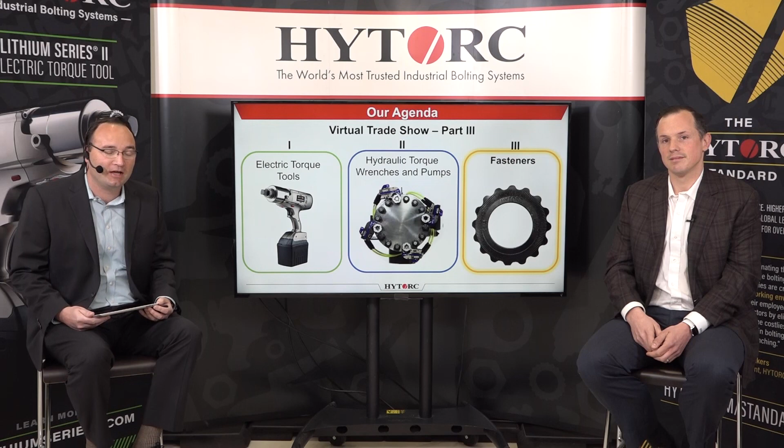So let's set the agenda. Of course, on day one, we started with the electric torque tools, and the Lithium Series 2 tool, certainly the star of the show. We also talked about the Lion Gun there. Yesterday, an impressive lineup of wrenches that we went through. Pumps as well, we talked about the Vector Pump, the Vector Mini. Plenty to talk about yesterday. And then today, we're going to talk about fasteners.

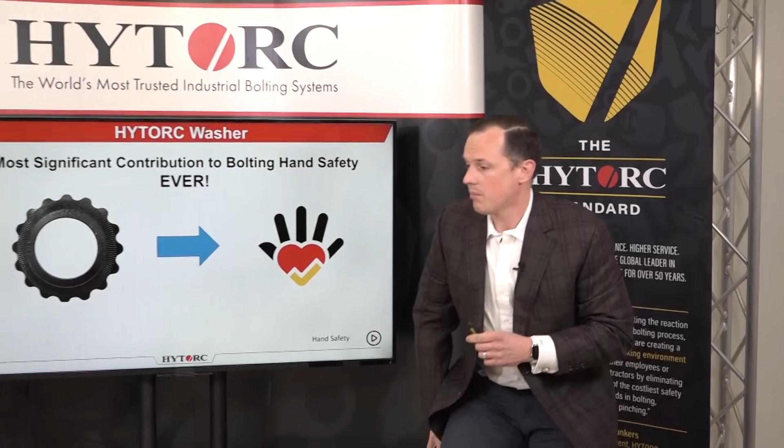That's something we really prioritized here, and we're very excited about the big step forward we're able to take for industrial bolting with this, because I think it was something that was needed. It really does take it forward in a significant manner, and that's why the enthusiasm is off the charts for this technology. Let's take a look at this short video, because hand safety at HYTORC is priority number one.

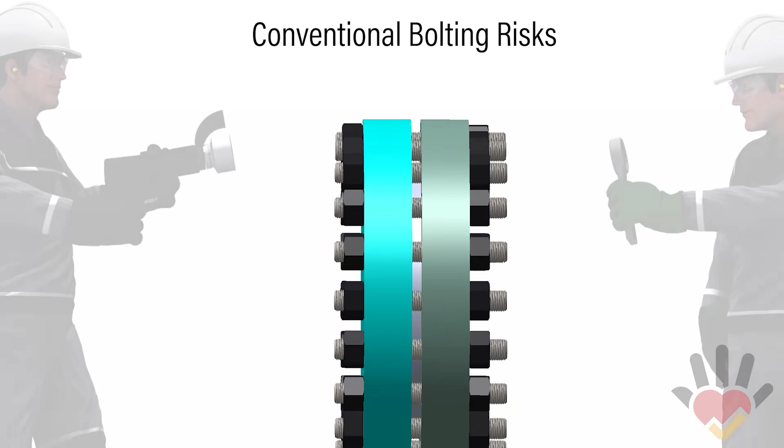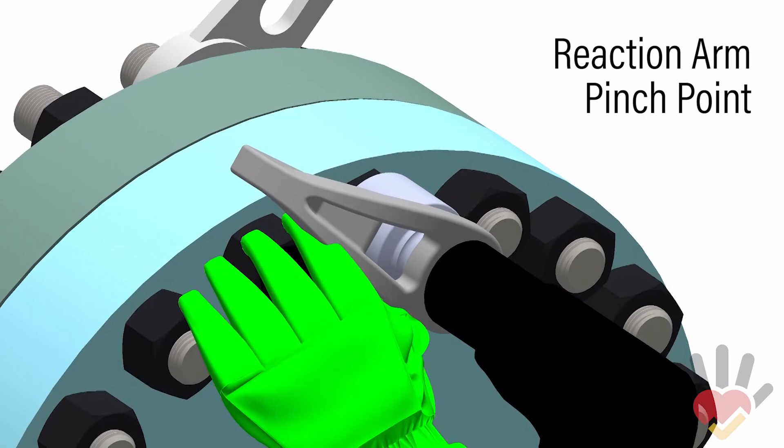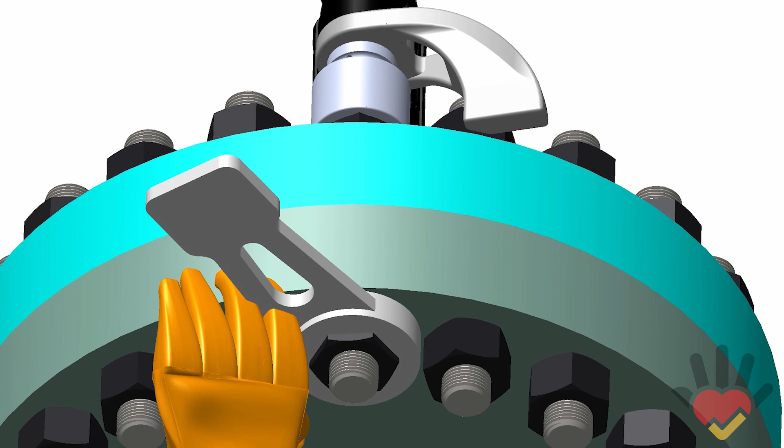Risks are very real for operators using conventional bolting methods with power torque tools, reaction arms, and backup wrenches. When a power tool is activated on the front side of the flange, a conventional reaction arm creates a pinch hazard. Accidents can occur, leading to major hand injury. The backup wrench can also move, creating a pinch point. An injury occurring on the back side of the flange can be just as devastating as one occurring on the front. The HYTORC washer system is the only solution that reduces the risk of hand injuries by eliminating pinch points.

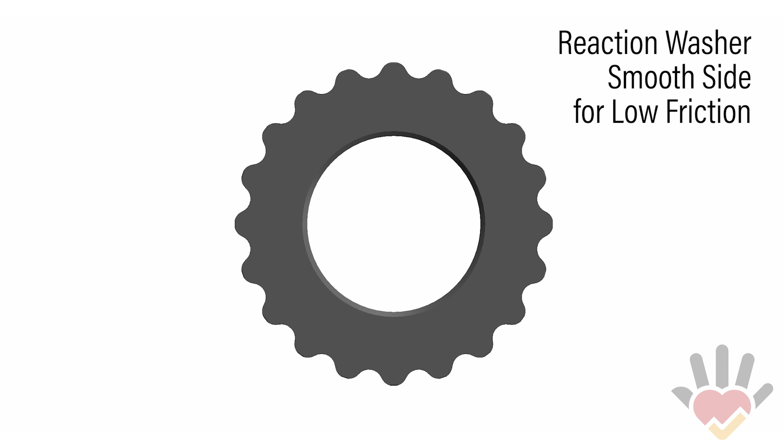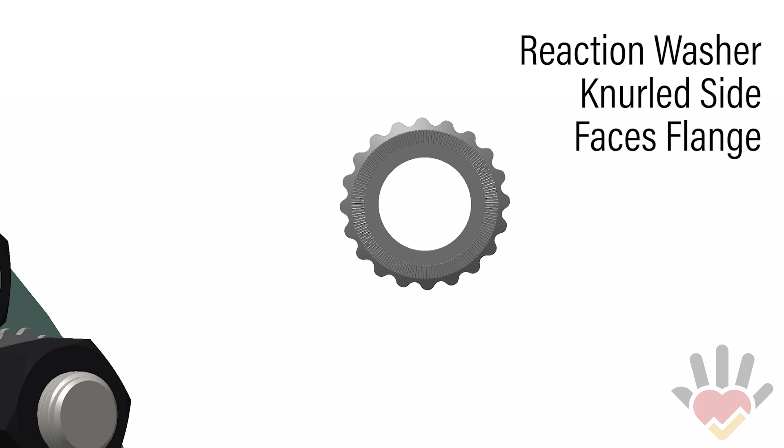The washer system is comprised of a reaction washer and a backup washer, which perform all the functions of standard hardened washers and more. The reaction washer features a smooth side to reduce the friction of the turning nut. The opposite side is knurled to keep the reaction washer from rotating. The contoured outer surface braces reaction forces during tightening, eliminating the need for a reaction arm. The reaction washer is installed with the knurled side facing the flange to prevent rotation. The smooth side faces the nut.

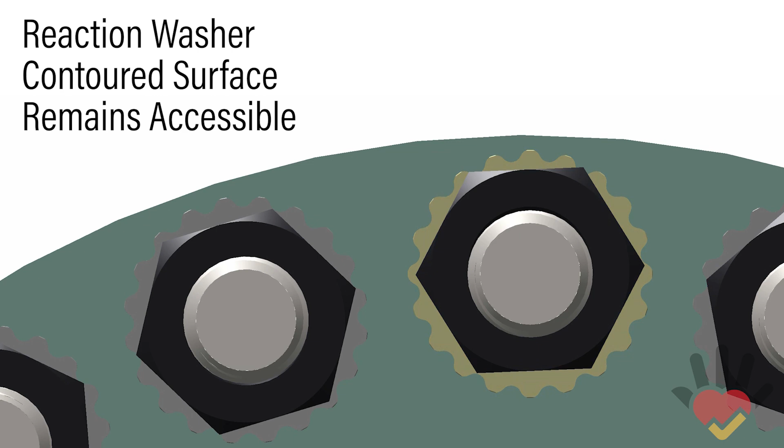The outer reaction surface remains accessible for tool engagement. The backup washer has knurls on both sides and is installed between the back nut and the rear flange. The knurled surface prevents the back nut from turning, eliminating the need for a backup wrench.

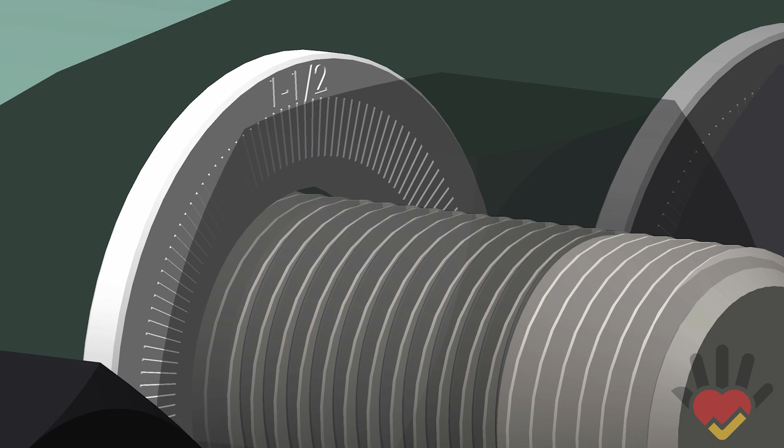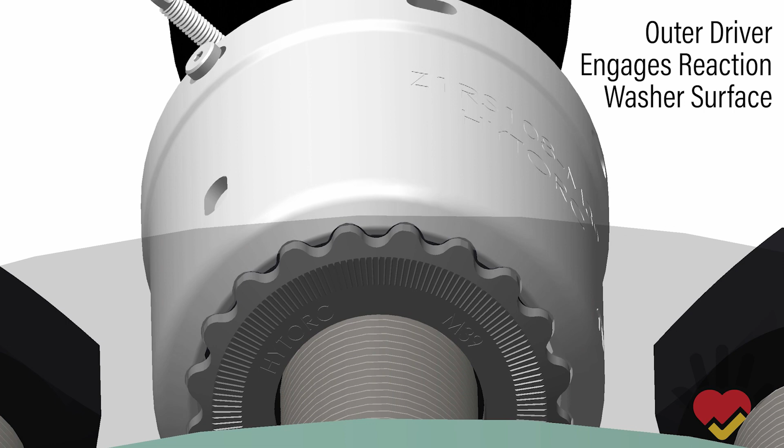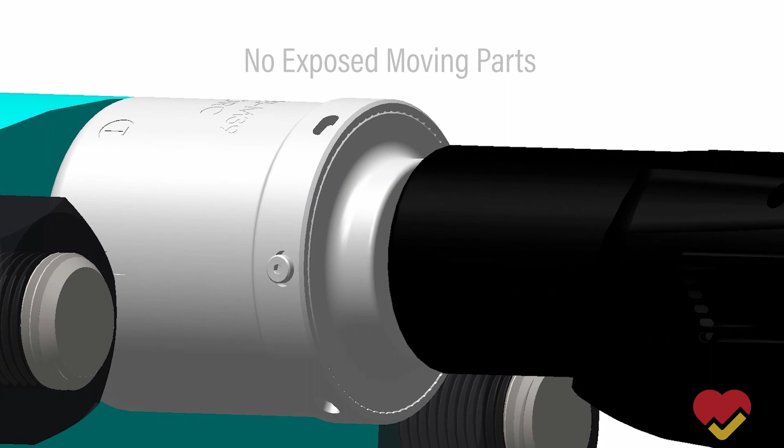When bolting with the HYTORC washer system, the dual socket driver is positioned over the nut and the reaction washer. The outer driver engages the outer lobes of the reaction washer. The inner driver is a standard socket that engages the nut. The socket turns the nut within the stationary outer driver. The advantage is obvious: there are no exposed moving parts. All reaction pinch points are safely contained inside the outer driver. On the opposite side of the flange, the backup washer replaces the backup wrench, eliminating rear pinch points.

The HYTORC washer is the only industrial bolting solution that can reduce the risk of hand injury by completely eliminating pinch points. Contact HYTORC today for a free demonstration.

As mentioned, it's something we're really excited about as far as the biggest step with regards to safety and hand safety in particular, because the hand is the most vulnerable part of the body when it comes to this industrial bolting equipment. As you can see with the standard setup here, if you're not familiar with typical bolting, you have a reaction member which has to hit against the adjacent nut. And if you get your hand caught in there, it can be severely problematic, as most can appreciate.

So with this washer system, it's quite simple. Basically, it's a hardened washer with a flower pattern on one side. It's got knurls on the bottom, which sit on the flange face, and all that does is create a little bit of friction. The driver engages with the flower pattern over a standard nut, and this becomes your reaction point. So there are no pinch points, there's really no external forces there, and it enhances safety because you're eliminating the main hazard.

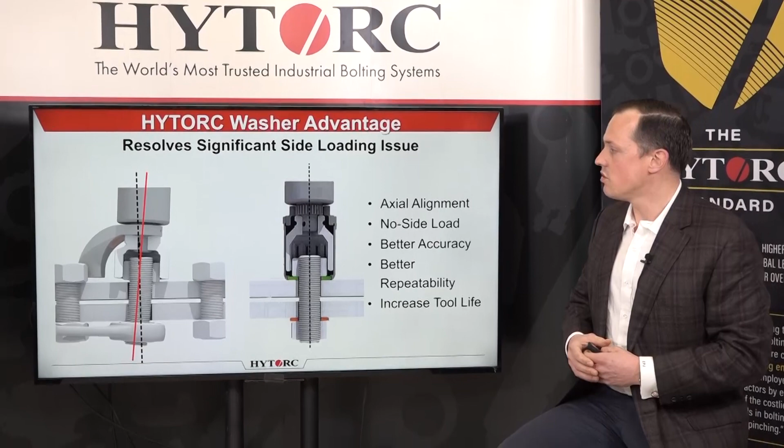I mean, that's really how I would simply put it. Beyond that, the advantages do go further. Safety is our most exciting benefit.

It's the one that really gets and deserves the most attention because it's obviously a priority. But you also have other areas this addresses, such as side loading. You have bending when you have a reaction member because there are severe forces going into that member. That's why you have the potential for injuries. If you get your finger caught in there, or anything caught in there, it can be problematic.

But it also creates a bending force in that stud, which can lead to accuracy issues, challenges, and galling, perhaps. There's a number of things it can contribute to. So we move away from that by having a straight axial alignment with no bending forces at all. That's really exciting for many of our customers, that it gets the side load out of the equation.

It also eliminates surface wear. The turning surface is a machined washer that we provide you, and you get away from surface issues that are often created when you're turning a nut on the flange face. So there's no need for any costly resurfacing, which is a big part of turnaround work at times.

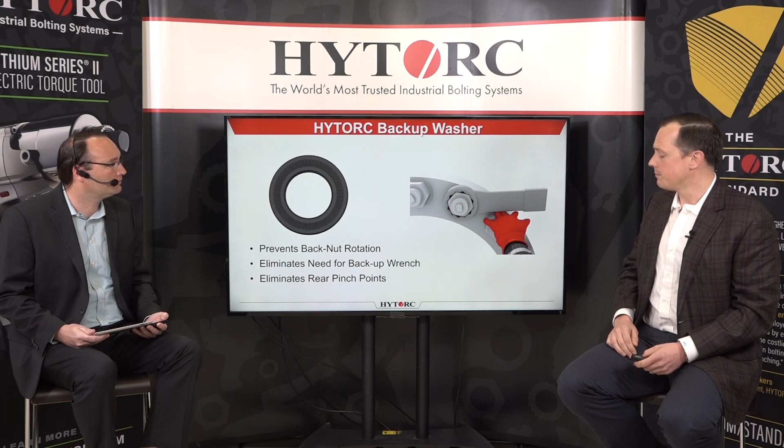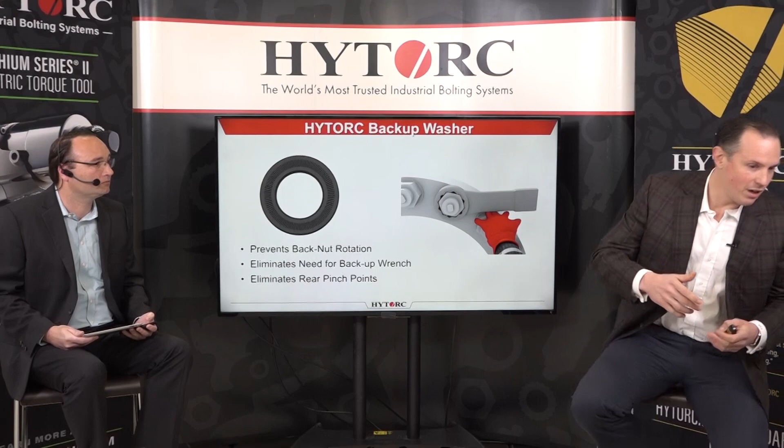When it comes to safety, it's important that we don't just talk about the reaction member, we also talk about the other side of the equation. Right here you can see on our flange is the backside. On the backside of the flange, you would have what's known as a backup wrench, like if you're tightening something at home, you have to hold on to that back nut.

Obviously, we're tightening to much higher values than you would at home, a much higher foot-pound output. As a result, it's very hard to hold on to this back nut, so you need a backup wrench. That creates another pinch point, because the forces in the backup wrench many times mirror the forces on the front side. So if you get your finger caught in there, it's problematic. That's another area we're eliminating with our washer system, what we call our backup washer.

And that's right here. You can see the variety of different sizes, but it's simply a round washer that goes on the backside and stops that back nut from turning. Very simple, very straightforward, and really beneficial—another contributor towards safety.

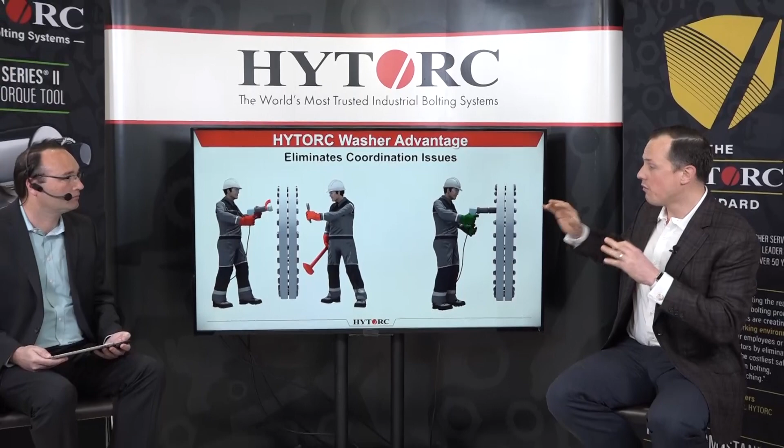What it all comes down to is also about efficiency, enabling our customers and workers to operate more efficiently. You're taking it down from two people to one person, getting away from coordination issues that occur when you're forced to use multiple people. This just makes the job easier, simpler, and more intuitive.

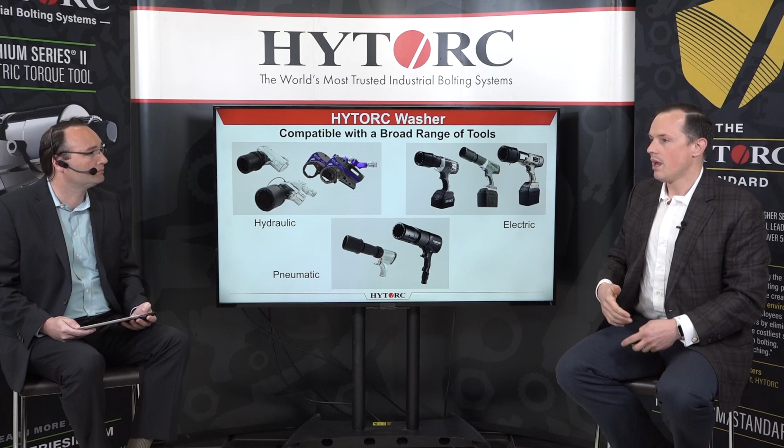That was huge for us, that's what we looked at. I mentioned yesterday and the first day, we're always taking feedback from the field, always trying to get an understanding of what the market desires. One of the big things had to do with: can you make this bolting equipment easier to operate, safer to operate, more efficient? That's something we've always looked to address.

I know we've taken several steps forward, but this is the biggest leap we've taken as an organization, this HYTORC washer, no question about it. It's a giant step for us as a company, something we're very proud of, and as mentioned before, our customers are excited about it.

You may have seen it out there because there are millions in the marketplace now. Many of the companies you very well know are using and installing them and seeing the benefits, mainly with safety, but also job quality, job schedule, reducing time, less manpower—really efficiency gains and productivity enhancements. So it's a game changer.

And that's one of the key benefits, and I hope we didn't gloss over it too much, is that when you talk about safety, if there's an injury on the job, that's downtime that they're not going to be able to produce. That's one of the biggest reasons you want to address this for your customers — if you can limit downtime, obviously they're going to be more efficient overall.

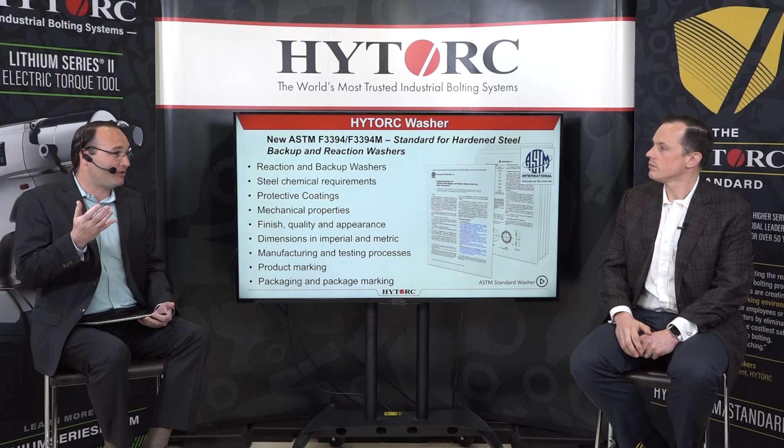Among the challenges HYTORC customers face, especially in structural and construction work, the guidelines are being raised. There are standards in the industry they need to meet. That's where HYTORC said, let's take on this challenge, let's go out and solve this, let's help them solve this problem.

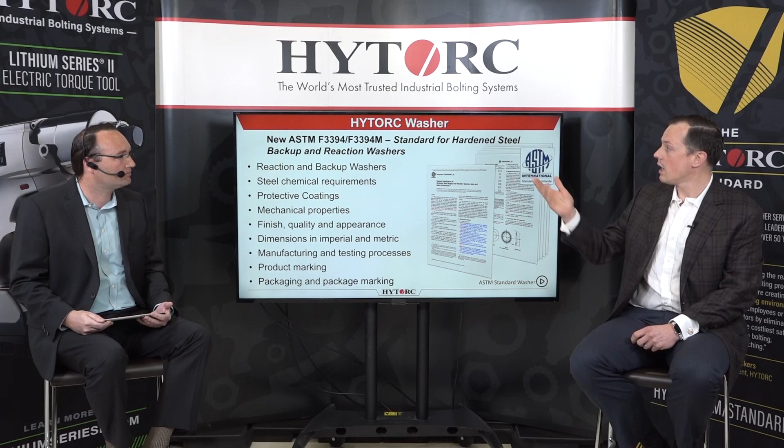We have worked with ASTM to get recognized by them with a standard for hardened steel backup and reaction washers. That was a question that always came up in the structural world: what is ASTM's position on it?

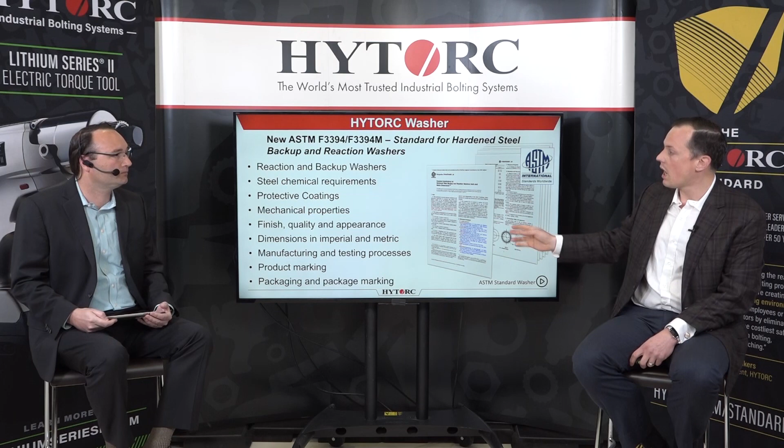We're happy to say that just within the past few months, after many years of working at this, we have that recognition. We've got all the documents, and it allows us to operate in this space perhaps easier than ever before. For any structural work, this was an important thing for us. Now it's opened the door for many opportunities with our customers to work at a different level, and many are already taking advantage of it.

And now HYTORC can offer you an ASTM standard washer.

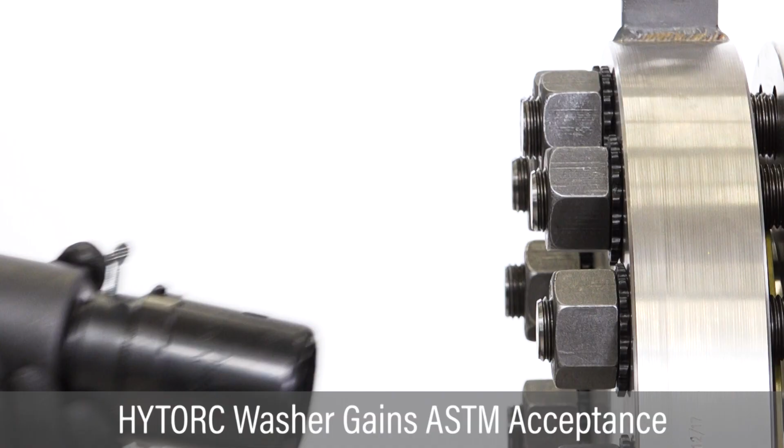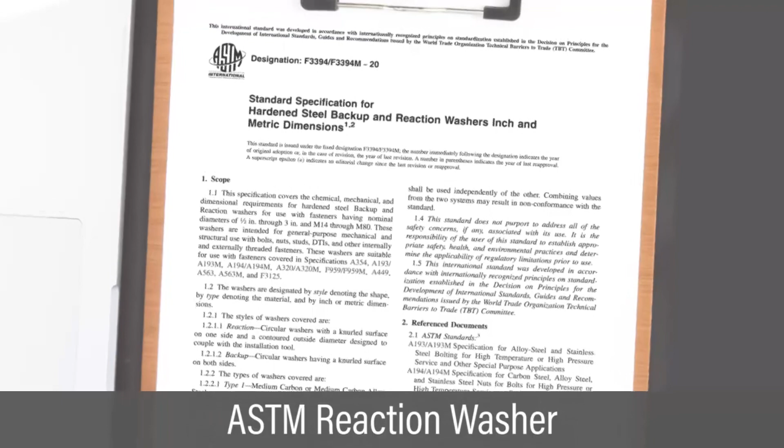HYTORC washers have gained international acceptance through the ASTM standards process. ASTM F3394, standard for hardened backup and reaction washers, is now being specified for critical bolting projects. The HYTORC washer is manufactured in accordance with the requirements in the ASTM F3394 standard, specification for hardened backup and reaction washers. The standard covers material, mechanical, dimensional, and other properties for a range of washer sizes.

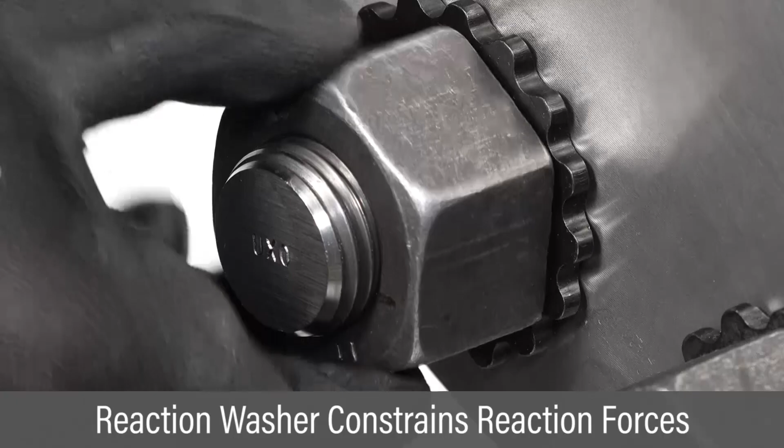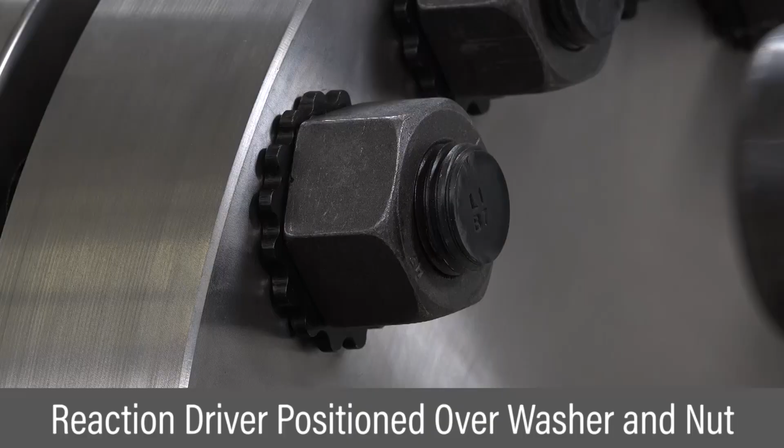The F3394 reaction washer is installed beneath the turning nut with knurls facing the flange to prevent washer movement. Once the nut is threaded onto the bolt, the washer outer surface remains accessible for constraining reaction forces. The F3394 backup washer is installed between the back nut and the rear flange to prevent the back nut from turning.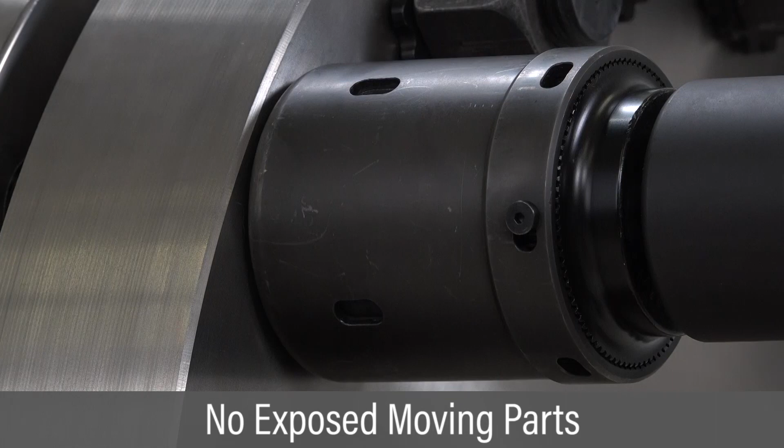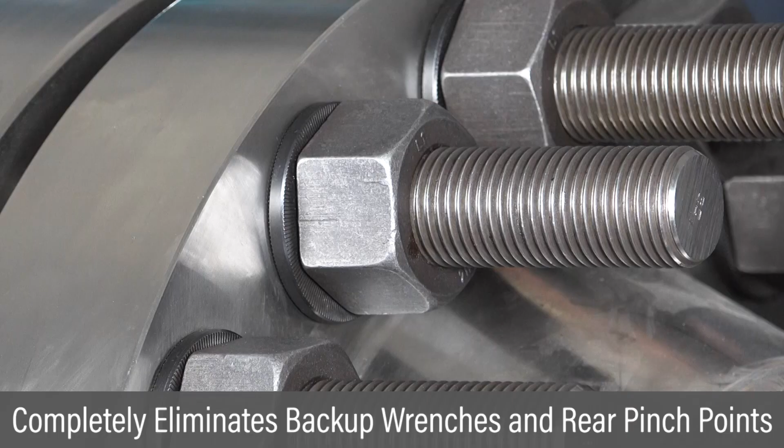When bolting with square drive tools, the dual socket driver is positioned over the nut and reaction washer. The edge of the driver engages the reaction washer to brace reaction forces. The inner driver is a standard socket that tightens the nut. As the nut turns within the outer driver, the advantage is obvious: there are no exposed moving parts. All forces are safely contained inside the driver, completely eliminating reaction arms and hazardous pinch points. On the opposite side, the backup washer keeps the back nut from turning, eliminating backup wrenches and rear pinch points.

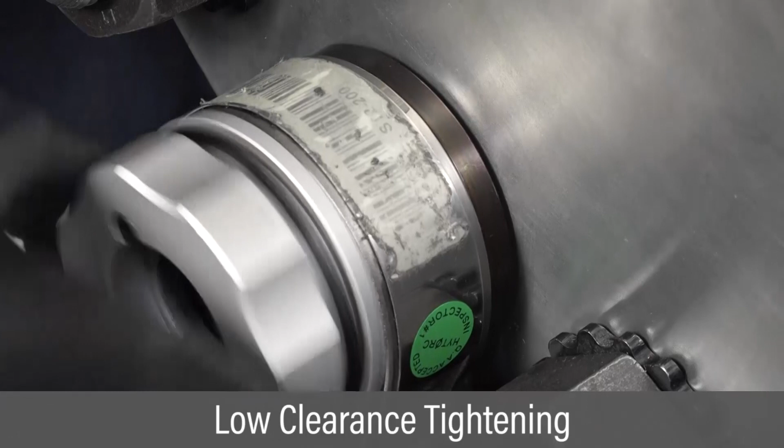Fasteners using washers in tight spaces can be tightened with low clearance tools equipped with reaction plates. HYTORC ASTM F3394 washers are now making bolting safer, faster, and simpler. The F3394 standard can be downloaded at astm.org. Contact HYTORC for a free washer demonstration or trial. The HYTORC standard: never settle for less.

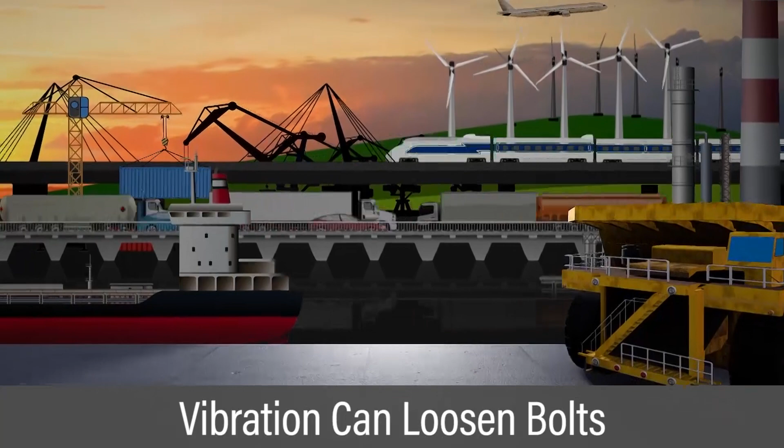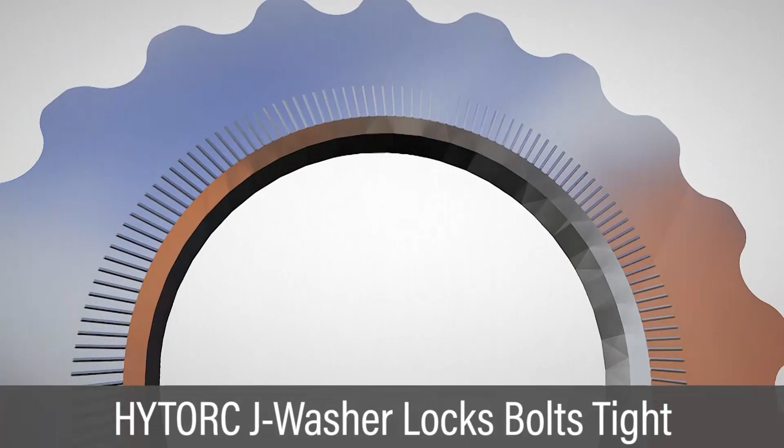In heavy industrial applications, increased vibration can loosen bolts over time. Loose bolts in structures, machines, and other systems can cause dangerous conditions. HYTORC now offers the J washer, providing a locking feature that keeps bolts tight. This unique design retains all benefits of the HYTORC washer system, including improved safety and speed during installation.

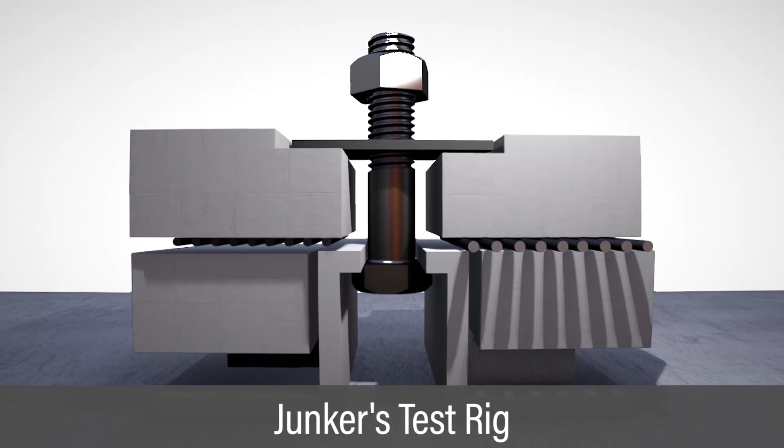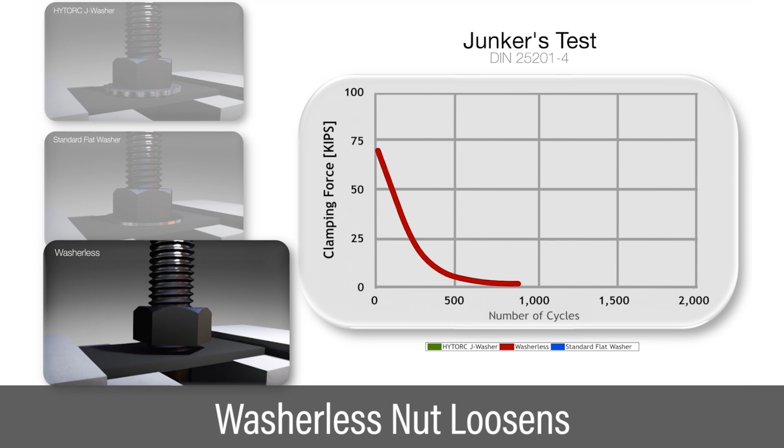The J washer is designed to stay tight under the industry standard Junkers test. This test simulates the vibration loosening that occurs in many applications. When tested without a washer, the nut comes loose. When tested with a flat washer, the nut still comes loose. However, when the HYTORC J washer is included in the fastener during the test, the nut does not come loose.

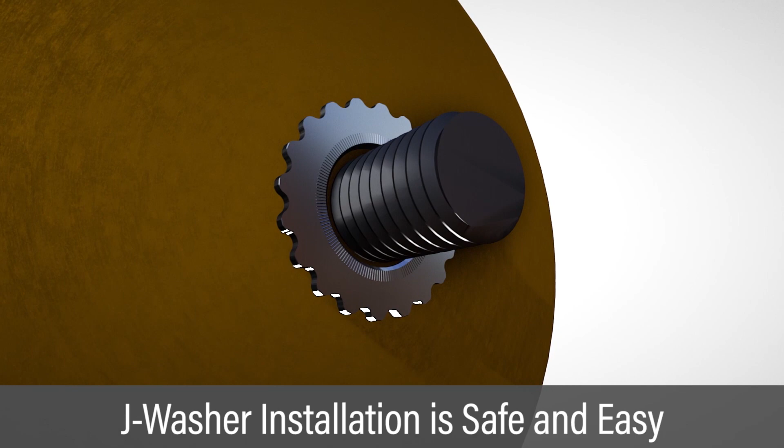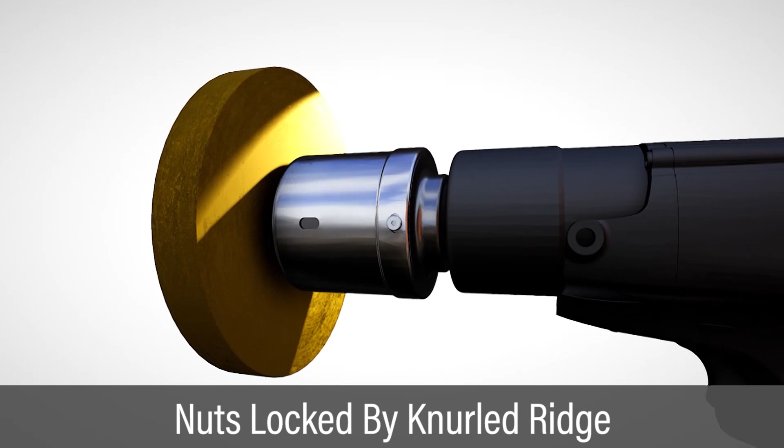This new washer design is installed with outward positioned knurls against the bearing surface and the inner knurl ridge facing the nut. The tool driver is positioned over the nut and engages the washer lobes. During tightening, the nut is locked in place by the knurled ridge.

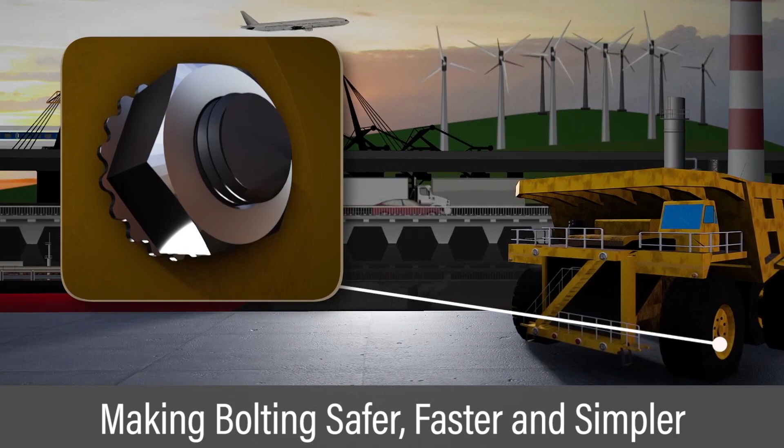The J washer, combined with HYTORC tools, provides the most advanced bolting solution available, making your bolting safer, faster, and simpler. The HYTORC standard. Never settle for less.

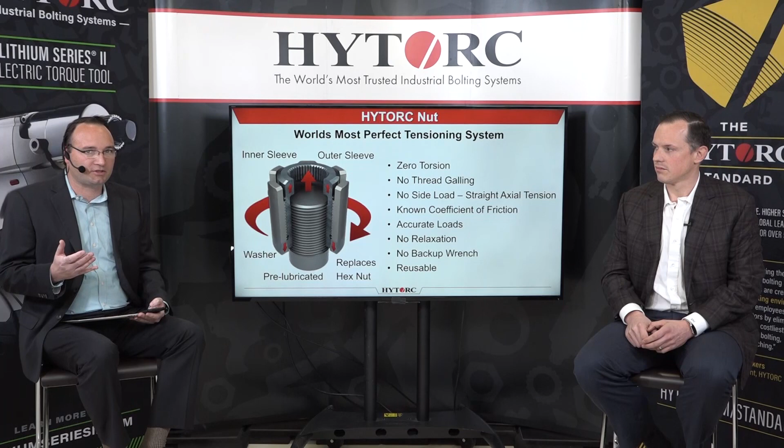One of the questions that I have for you, Eric, is because the technology is always changing and you guys are introducing new technology to help your customers meet the challenges that are out there. We've heard trade-in talked about before. There are trade-in opportunities here. There certainly are, and that's something that many of our customers take advantage of. We will trade in our older technology as well as even other manufacturers' technology in order to bring you to the latest equipment to enable you to work with some of these systems.

We recognize and appreciate that you've made a significant investment in HYTORC equipment, and it's not something we expect for you to just part with and then move on from. We'll work with you and provide you with a comprehensive proposal that really addresses that aspect of it and makes the overall cost a little bit more palatable. So that's definitely an area that we work with our customers on and get in deep with, and I think it makes things work. It's a nice program that many take advantage of.

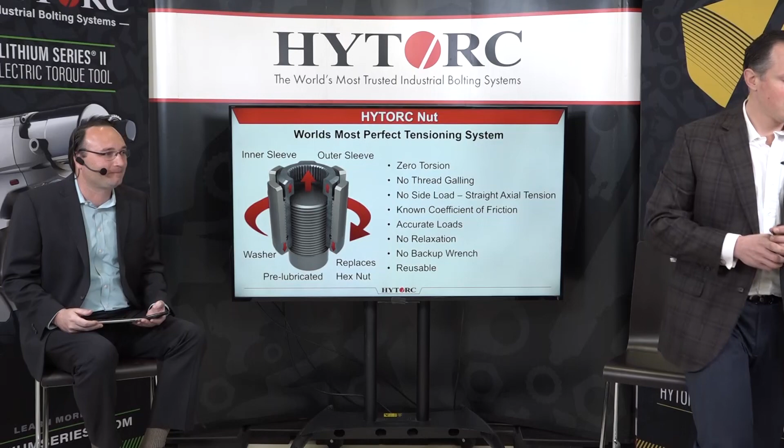As we continue on, the topic of the day is fasteners, and when you talk about a shining star out there, that's got to be the HYTORC nut. Yeah, the HYTORC nut is a product group that we've had out for over 20 years now, and it's something that got us started in fasteners.

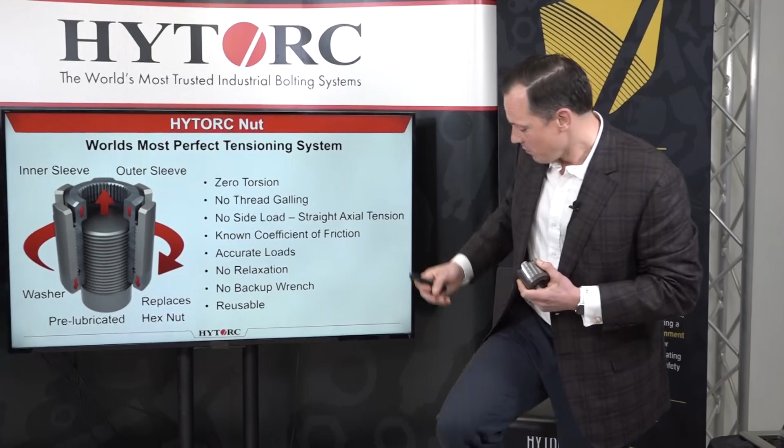I've got one right here in my hands, and you can see a lot of the information right on this screen. It's a replacement nut, a 3-piece nut that enables you to get some significant benefits. Benefit number one that we've talked about with the HYTORC washer is very much present in this nut: the ability to eliminate that hazard, eliminate that reaction member, and we've accomplished that with this nut. Our efforts to get rid of that hazard have been in place for many decades and is evident in this HYTORC nut system.

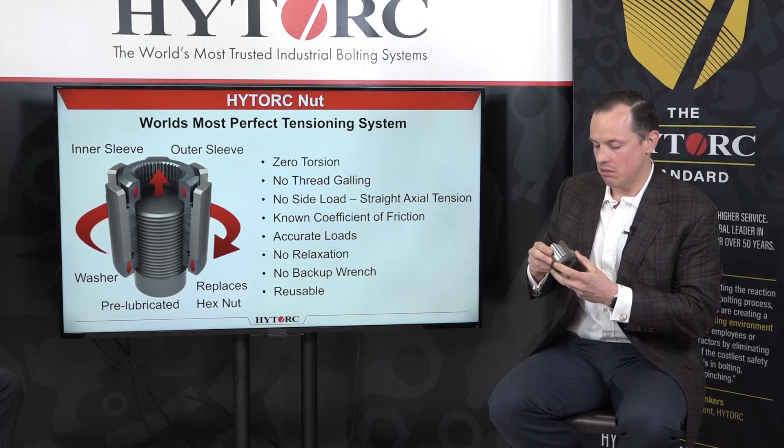This is something we've been offering for a number of years. Many of our customers look to it in critical applications; the power industry uses it commonly. Reactors, as an example, are looking for it. It gives you a lot of consistency, a lot of repeatability. One of the biggest things it can contribute beyond safety is that it eliminates galling entirely - galling being the fusing together of metals, which is problematic on any bolting work. It requires you at times to cut the fasteners off, and that's time consuming.

We've got a lot of different benefits built into this system, and it complements our HYTORC washer very well. At this point it's kind of balanced out - this is used in the more critical application areas, where galling could be present, where maybe space is a challenge. It's got a castle nut on the top that you engage with, so you really don't need any side clearance at all, as opposed to your standard nut where you need a socket to come over it. That's why in the power industry it's very exciting and interesting, and it's a great product, one we've been proud of for a long time. It's won many awards, and you can see it throughout industry at this point in time.

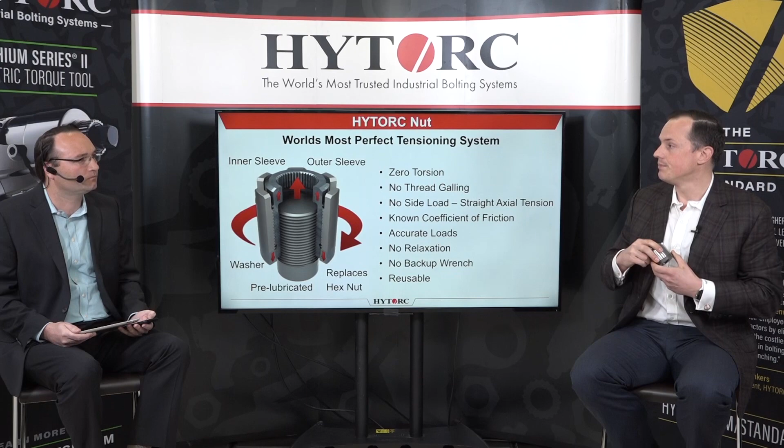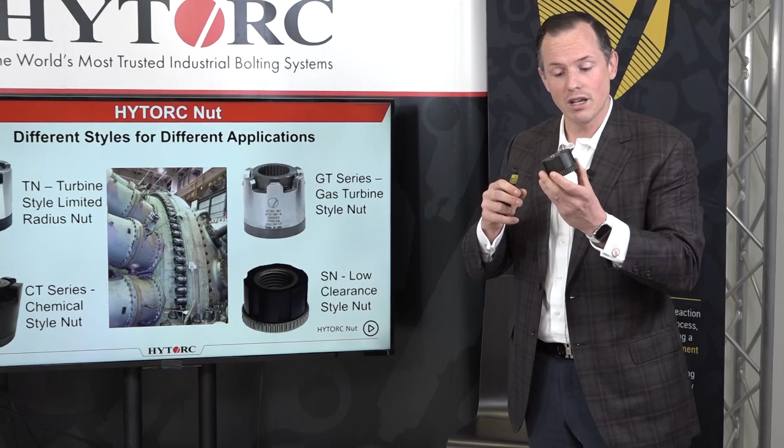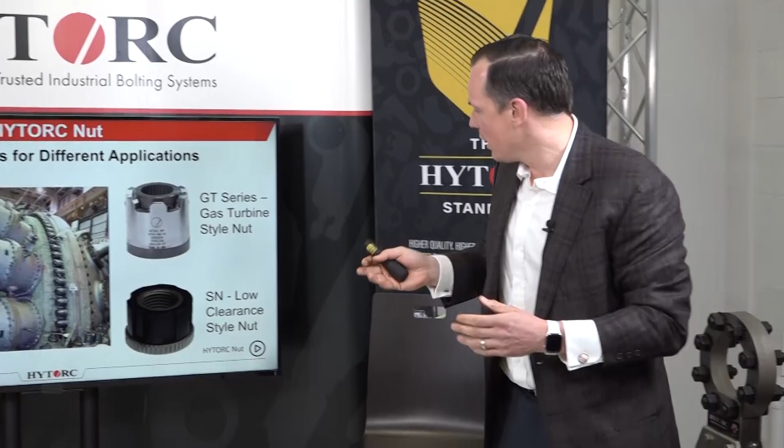There are some variations to it as well, depending on the application. Right here I was holding the TN style nut, but we've got a variety of them - just different varieties based on what you're looking for. You've got a low clearance nut, which enables you to come in overhead with our limited clearance tools; we wanted to make sure we have something for everyone. You've got the CT series chemical style, where it allows you to come through with the stud - that was important to us, so you don't have challenges with your stud length. Really something for everybody. And as you see, the top two variations are the TN and the GT series, gas turbine series. So it's really something for everyone.

That's the spirit behind it. We wanted to ensure that we could provide you with this nut no matter what your circumstance was, and that's exactly what we've done with these different varieties. It's enabled us to work in many different places, in many different industries.

That leads us to one of the questions here: does HYTORC have any experience in the nuclear industry with either the HYTORC washer or the HYTORC nut? A lot of experience in the nuclear industry - that's an area where this HYTORC nut is very popular.

That's obviously very critical work, as is everything we generally get involved in, but that's an area which has really gravitated towards the HYTORC nut technology. I think the galling prevention is significant. Again, also the time savings. Everything that we look to do is all about safety, job quality, and job efficiency. And we hit that with the HYTORC nut in a tremendous fashion.

There's no question nuclear is a very popular industry, and if you go into a nuclear power plant in the United States or in the world, you may very well see these HYTORC nuts already installed. Let's learn a little bit more about the HYTORC nut.

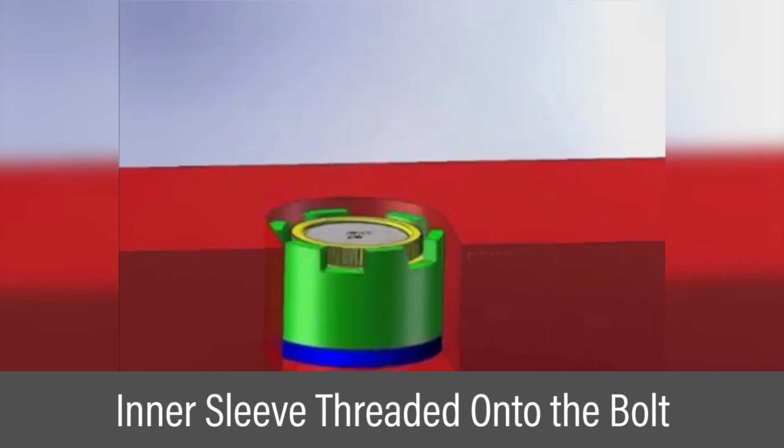The HYTORC nut improves safety, speed, and accuracy in critical bolting applications. By replacing standard hex nuts, the total job time can be significantly reduced. The nut assembly consists of an outer sleeve, an inner sleeve, and a washer. The outer sleeve is thread connected to the inner sleeve, and the inner sleeve is threaded onto the bolt. As torque is applied to the outer sleeve, it pulls on the inner sleeve, applying pure tension to the bolt. The integrated washer is spline coupled with the inner sleeve, providing a firm reaction point.

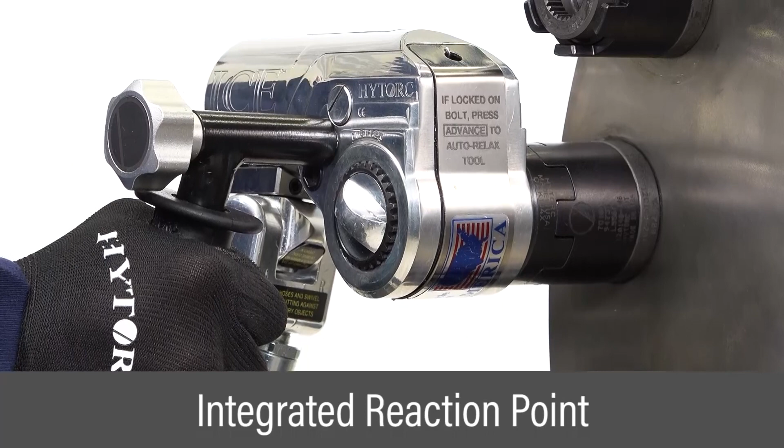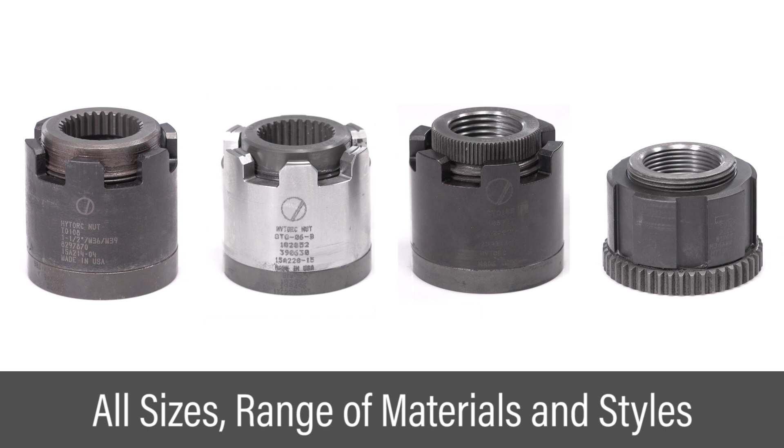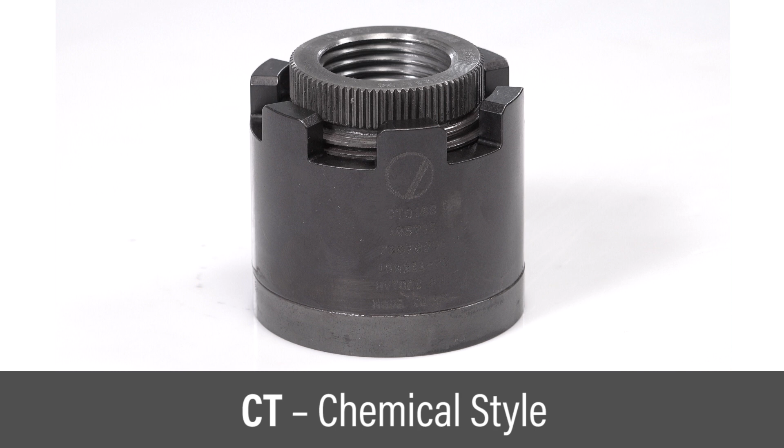During installation, reaction arms are completely eliminated, along with potential pinch points. HYTORC nuts are available in all sizes and in a wide variety of materials and styles. The TN style is designed to fit the tight spaces typically found in steam turbine applications. The CT style replaces hydraulic tension fasteners, allowing stud protrusion beyond the nut. The GT style handles high temperature and stress, often seen in gas turbine bolting. The SN style is used in tight spaces where other fasteners can't fit.

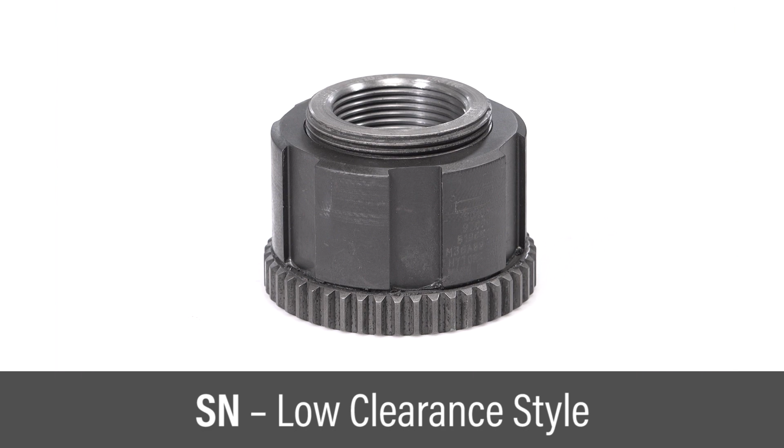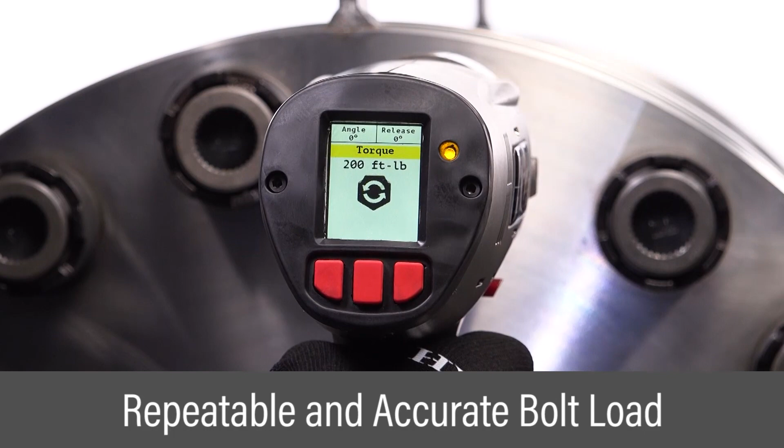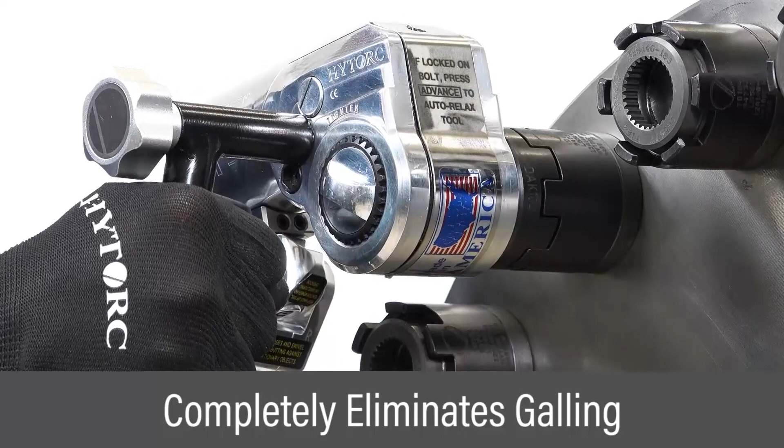Precision machined and lubricated surfaces allow tight control over the coefficient of friction. Calibrated torque applied to the nut results in highly repeatable and accurate bolt load. Tightening stops at the desired bolt load, and relaxation found in other tensioning systems is eliminated. This technology completely eliminates galling of bolt threads and flange surfaces. Nuts may be tightened with a variety of HYTORC electric, hydraulic, and pneumatic tools. Nuts are easily disassembled and completely reusable.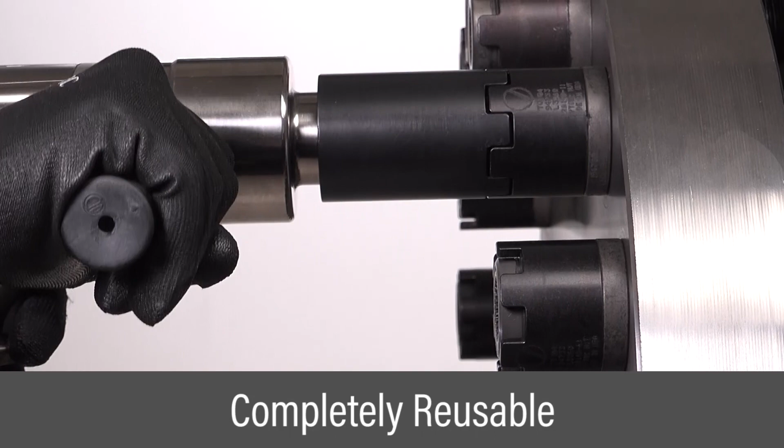HYTORC nuts make critical bolting applications faster, safer, and simpler. The HYTORC standard: never settle for less.

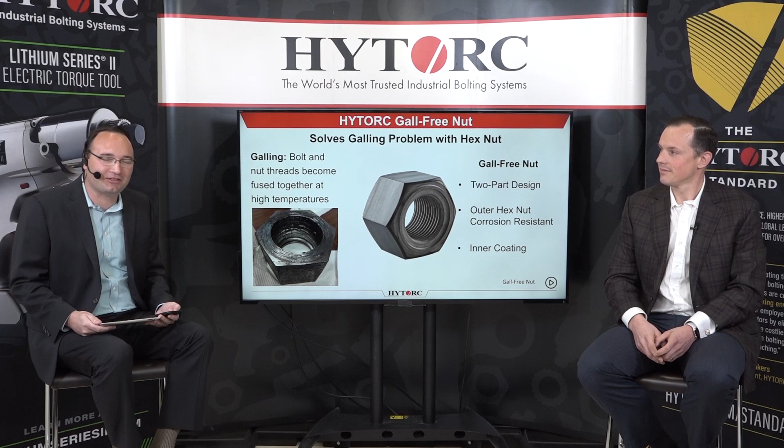And we continue with day 3 of HYTORC's first ever virtual trade show, with Tony Marino and the president of HYTORC, Eric Junkers. Eric, when you talk about significant challenges for your customers across a couple different industries, but certainly some high pressure industries, it's the galling out there. That's a significant challenge that you guys had to address.

Yeah, it was one that you see in many different industries, high temperature applications, and it's the fusing together of these metals, and it's highly problematic. You end up many times needing to cut the nut off with the old blowtorch, cut it right off, and that's time consuming and costly. So we wanted to address that, and we did address it with our HYTORC nut setup, as I had mentioned before.

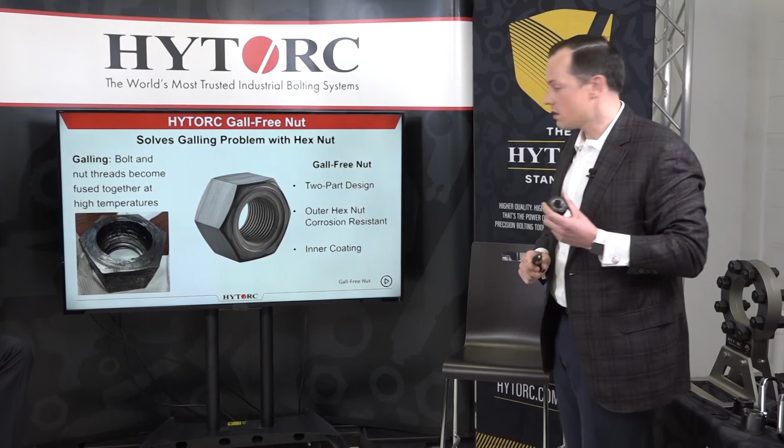A lot of the things that we learned with the HYTORC nut, we applied in a new product that we released within the last couple of years, and we call that our gall-free nut. I'll go and grab it real quick. There's not much to it because it really does look just like a standard hex nut, as you can see on the screen and as you can see from the one that I'm holding in my hands. But there's a lot of research and development that went into this, and some clever folks on our team really made this come to fruition. It's something we're very excited about because it allows us to get one of the significant benefits that come with the HYTORC nut system, the galling prevention, without going the route of the HYTORC nut.

Now, that's something that depends really on the situation, what it is you're looking for, what makes sense for you. The beauty of working with a regular hex nut is, yeah, you can work with your standard tooling. You don't need to change the fastener, the stud length, and that end of things.

So what it comes down to is it just expands upon our offering. What we do is work in close concert with our customers to identify what really is it that they're looking for, what works for them. That's true of the fasteners, the tools, the pumps, the services. We lay it all out in a comprehensive proposal that goes from A to Z, gives you all the justifications as to why this makes sense, and most importantly, gives you the return on investment for that equipment. So that's kind of how we approach it.

This really expanded upon our offering greatly because galling is a real headache. Some would describe it as more than a headache, but it's a real issue in many industries - the oil industry being one of them, but power, mining, and so on. It's really everywhere. To be able to eliminate that entirely with just a fastener is a real exciting step and something no one's ever done before.

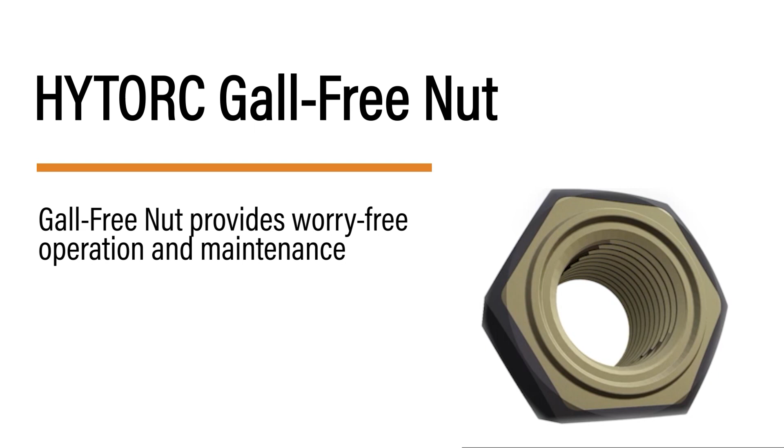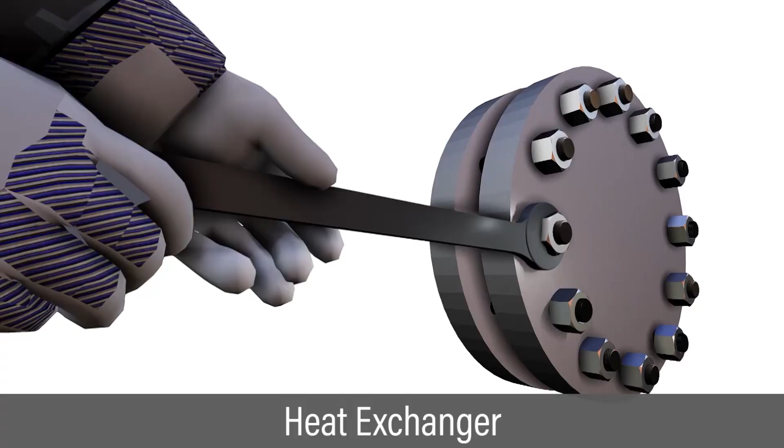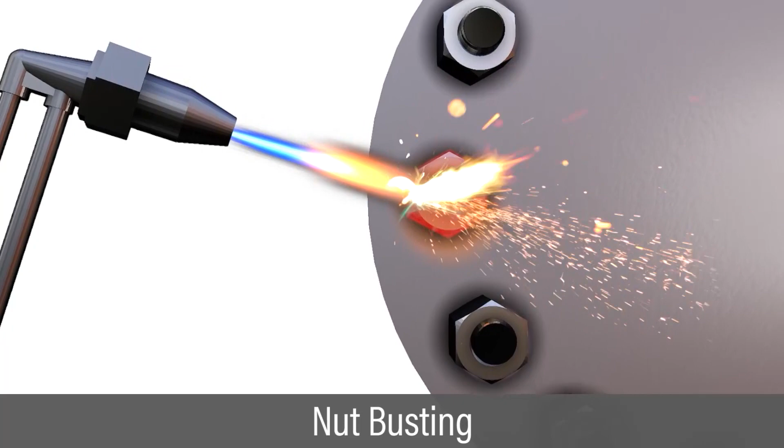Industrial applications such as refineries operate for thousands of hours at high temperature. Heat exchangers and other equipment are subjected to continuous temperature and stress. A problem arises during maintenance, where nuts become difficult or impossible to remove. Often there is no recourse other than to destroy or cut off the nut and repair damaged flanges. The core problem is usually due to galling, a process where metal surfaces are fused over time. HYTORC offers the gall-free nut as a solution to avoid these difficult maintenance issues.

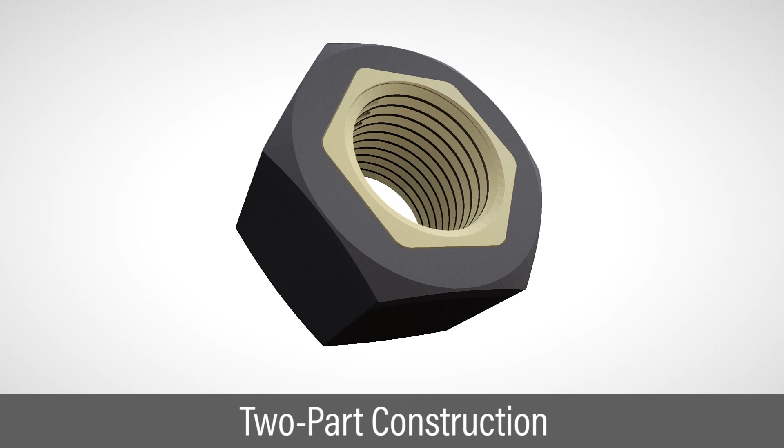The gall-free nut is a two-part design. The outer part is a hex nut constructed of corrosion-resistant material. The inner section is coated, so the thread surface will not degrade with temperature and stress. The gall-free nut is installed as any other nut.

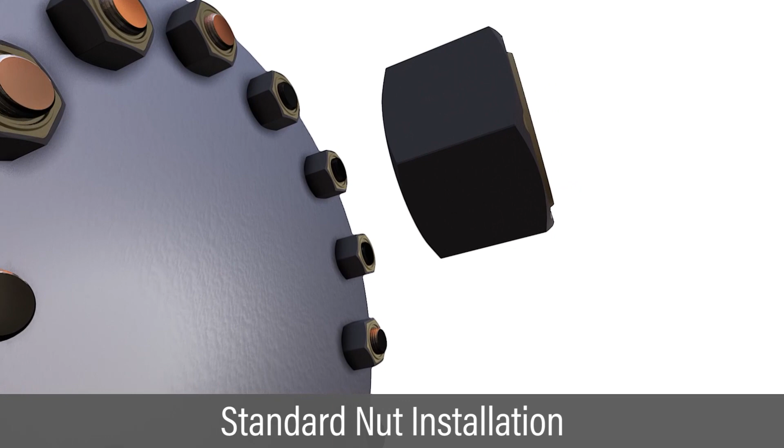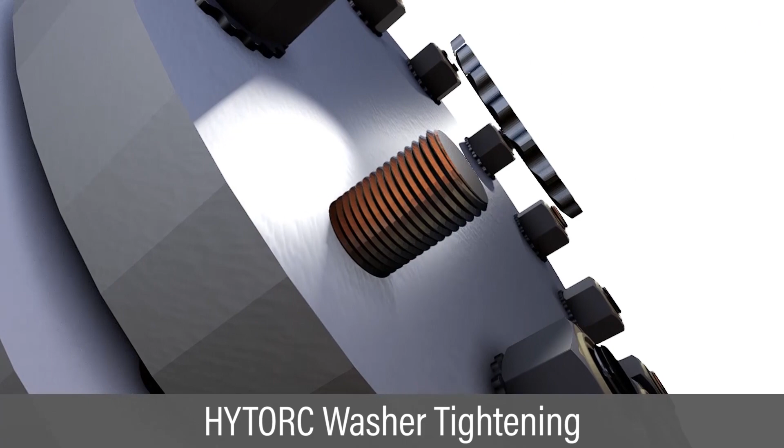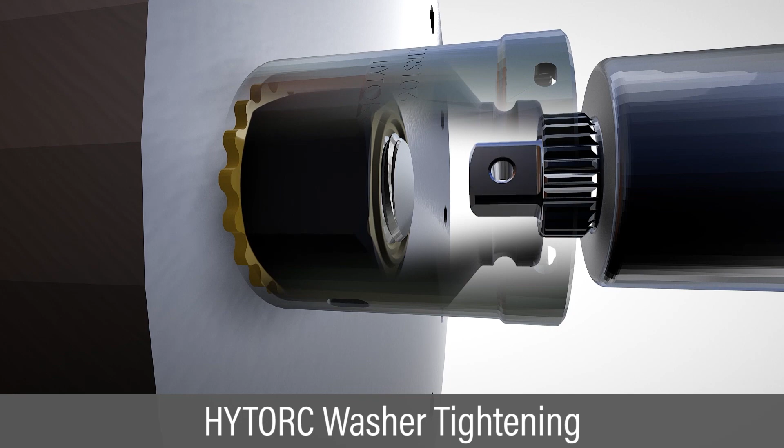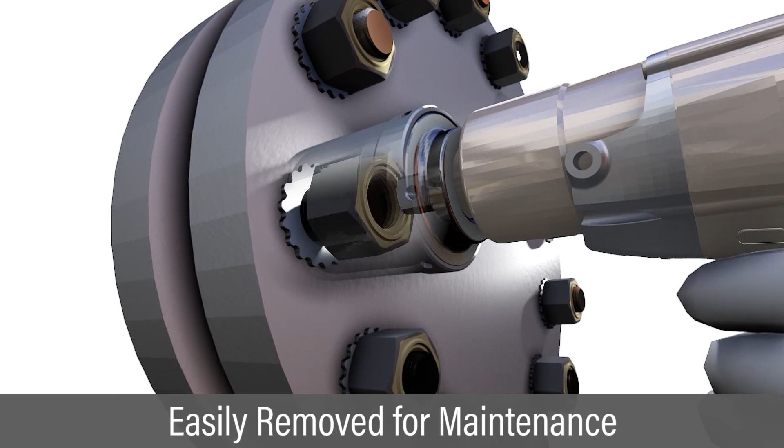The nut is tightened using bolting tools, just as with any other nut. Alternatively, the nut and fastener may include a HYTORC washer for the most efficient assembly. The gall-free nut can serve for thousands of hours on the application without galling. At the next maintenance activity, the nut is easily removed without damage to the fastener or flange. The gall-free nut provides an innovative solution to make your bolting safer, faster, and simpler. The HYTORC standard. Never settle for less.

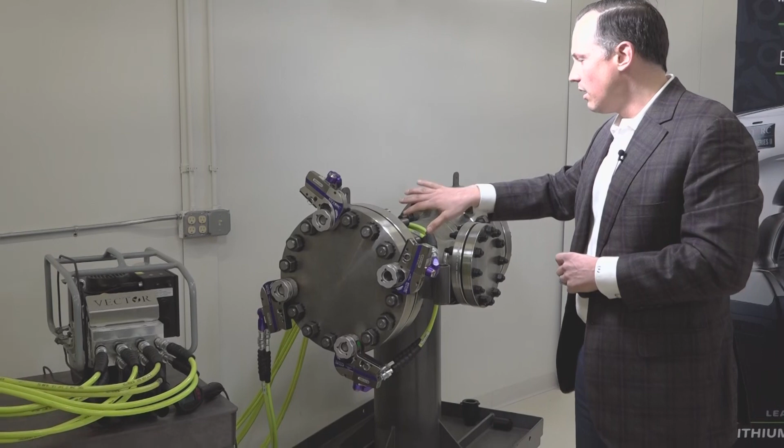Let's start with some questions from Q&A. How many times can the washers be used, and how much time savings in comparison to standard work methods? The time savings are pretty significant. At the end of the day, what we're doing with our system, we have an example of it over here. We have our 4-tool system right here that really shows you exactly where time savings can be seen in a significant fashion. And the washer is a component of that.

It's not the entirety of it, but it's a big component of it. And what it allows you to do is work in a much simpler, more intuitive manner. There's no fumbling about with reaction members trying to find a quality reaction point. You put the tool on the job, you can step away from it, operate with multiple tools. A big contributor is also the pumping unit, which allows for parallel joint closure. So really, it's a system. It comes down to the system.

But what we've seen is over 50% time savings in many cases. In most cases, it's over 50%. That's really a combination of factors that lead into it, the washer being a very big one, and it's a big contributor towards that. So that was a great question out there.